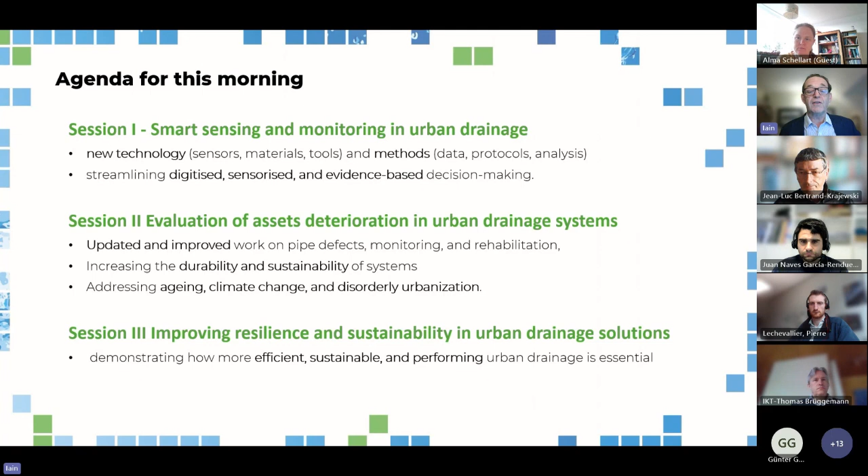Then the third session is looking at improving resilience and sustainability. For that, it's about having efficient, sustainable and good performing systems, and how we address consequences of things like pollution and flooding and urban vulnerability to extreme events.

As a reminder of what Co-UDlabs actually is, it's a Horizon 2020 project that has brought together 7 research institutes from around Europe. The purpose of Co-UDlabs was to get us working together to address common issues and to look at how we can learn from each other and how, in future, as urban drainage research facilities, we can encourage collaboration at the international level.

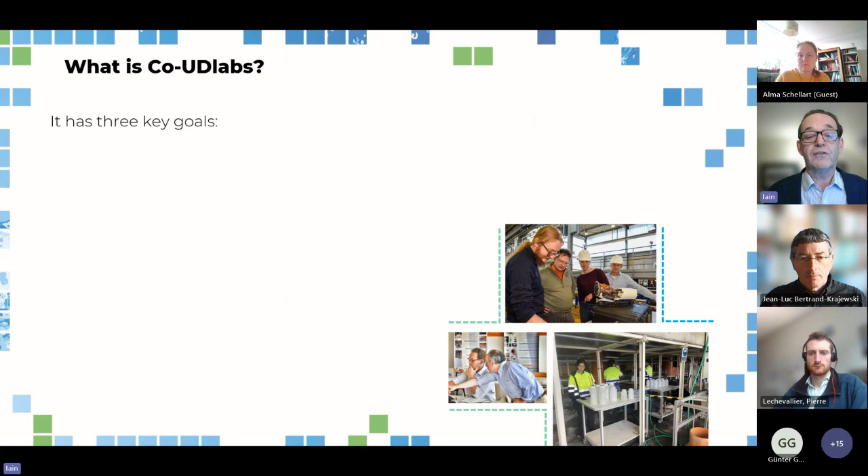Co-UDlabs has had 3 key goals over the last few years. The first, as I've mentioned, is fostering cooperation and providing networking. The second, and perhaps the largest element of it, is to facilitate transnational access. This is exchange and collaboration.

Under the rules, somebody from Germany could apply to do research in any of the other facilities, but not the one in Germany, and vice versa. The Brits had to go to mainland Europe to do their research. The transnational access has resulted in a huge amount of practical research work, some of which we're illustrating in the presentations we're doing this morning.

That is what that is about: we had 3 joint research activities, covered by the 3 sessions. This is where we, as the research organizations, undertook work with each other to address particular issues.

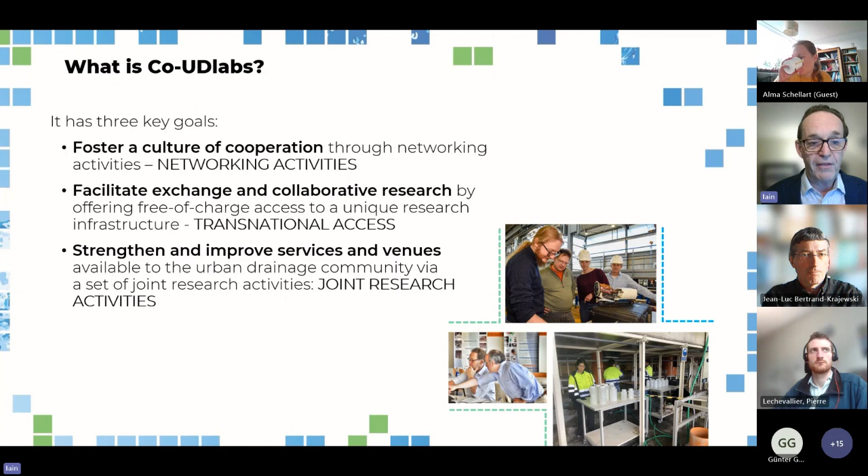We're creating this UDrain, working with the International Water Association and Joint Committee. We've started by putting together an inventory, an atlas of research infrastructures available in Europe and around the world. We want to build a community, and a lot of it's about enhancing uniform practices. This is one of the things we found early on, that we all do things slightly differently in different countries, and there's a need for harmonizing and ensuring that we work in a uniform manner.

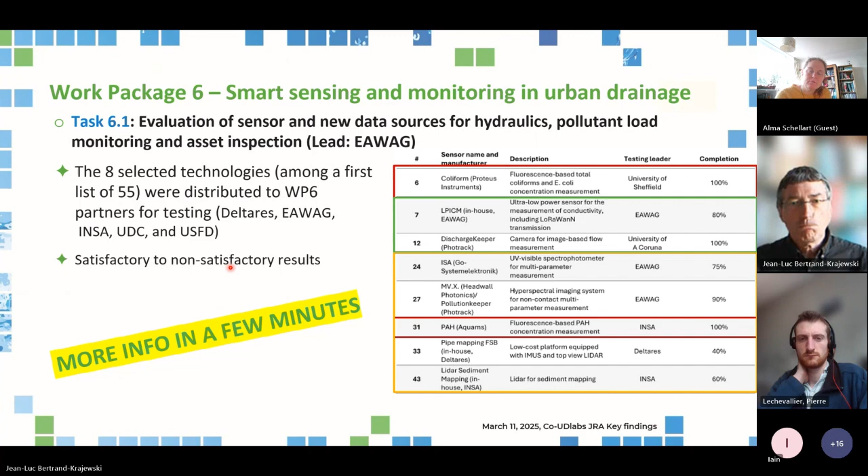For Task 6.2, we developed during the project a software tool coded with MATLAB, named UDMT, Urban Drainage Metrology Toolbox. It's a set of coordinated tools and methods implemented in an easy-to-use system, covering the whole chain from data acquisition - after you have calibrated your sensor or correlated it with traditional lab analysis - to collecting raw data from your sensors and transforming it into corrected data based on the calibration and correlation functions established in step 1.

Once you have raw corrected data, you can work one step further to assess the uncertainties in this data. Then you go to step number 4 with data validation, where different validation criteria can be tested. We've added a 5th functionality about tracing experiments, as a tool to check and validate some discharge measurements in sewers.

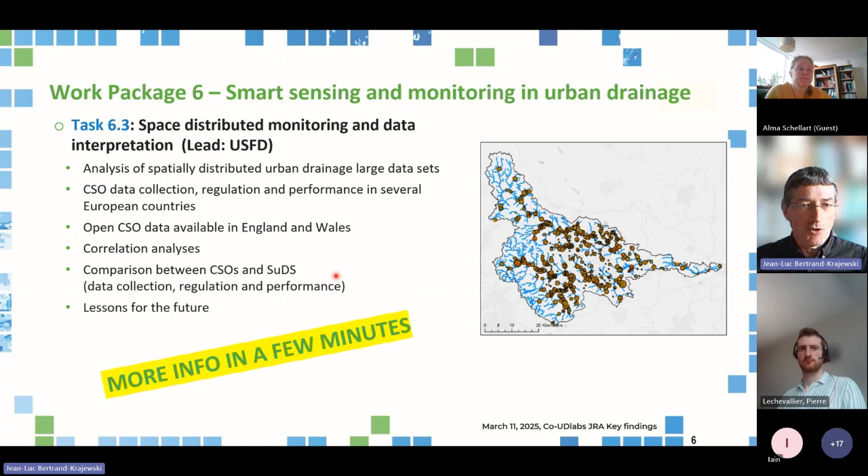Another key aspect of Co-UDlabs was implementing open science and open data sets. So all the data sets produced during the Co-UDlabs project, from testing the sensors to the code of the UDMT, everything is available on the Zenodo community repository based on the Co-UDlabs project. Again, everything will be updated by April, May 25. We invite you to go there if you want to access the reports, which are also available on our website, but more importantly, all the data sets generated by the project.

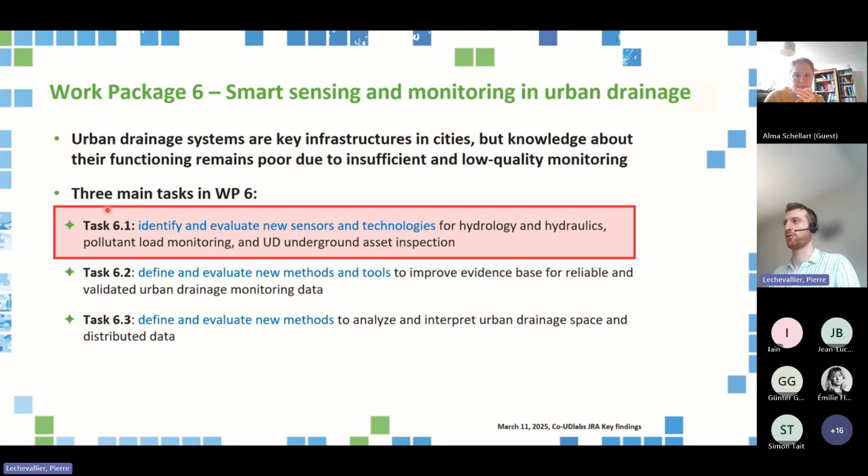So first of all, why is it so important to monitor urban drainage systems in a better way? The role of urban drainage systems, as you know, is to bring polluted water from their source of emission all the way to treatment facilities.

This task has two aspects. The first is to ensure that we protect the environment, so it's what we call the quality aspect of urban drainage systems. We want to bring badly polluted waters all the way to treatment facilities. But urban drainage systems also have another aspect, quantity, because those infrastructures handle not only urban wastewaters but also stormwaters, the water that falls from the sky when it rains. It can happen that lots of water all of a sudden enter the urban drainage systems. So basically, those two aspects, quality and quantity of the water, need to be handled by those infrastructures.

Now, if we want to avoid emission of polluted waters into the environment and better treat them, it's a good idea to have better monitoring of those systems, monitoring the quantity of water, the quality of the water, as well as the infrastructures themselves, seeing if the pipes are well maintained or if there are holes or cracks.

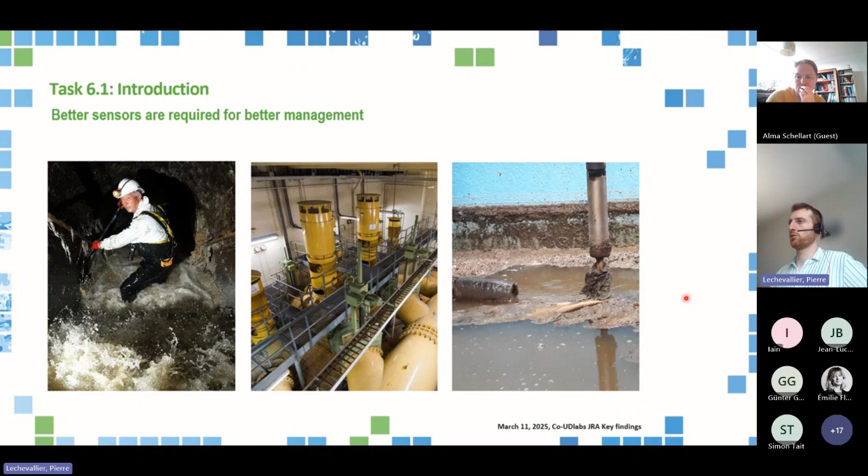So, as you know, in the project we decided to test 8 innovative technologies to monitor the sewers. We started originally with a list of 55 sensors, mostly focused on water quality and hydraulics, but also other aspects. Those 55 sensors were selected based on the opinion of all the members of the Co-UDlabs project. Everyone could propose a sensor to be tested, and we ended up with a list of 55 sensors.

From this list, INSA and EAWAG collaborated to reduce it to about 15 sensors, mainly based on our expertise. Once we had those 15 sensors, we asked again all the members of the consortium if they had interest in testing them and if they had facilities suitable to test them. That's how we ended up with a list of 8 sensors, along with a list of facilities that are motivated and have the capacity to test them. This whole process is described in much detail in deliverable 6.1, which you can already find online at this link.

Regarding the 8 sensors we decided to test, we have the Proteus sensor, which measures coliform. We have LPICM, the low power inductive conductimeter, a sensor able to monitor conductivity with very low power use. Then we have the Discharge Keeper, a camera-based sensor able to monitor flow. This is actually the only sensor we tested aimed at monitoring quantity; the other sensors are for quality.

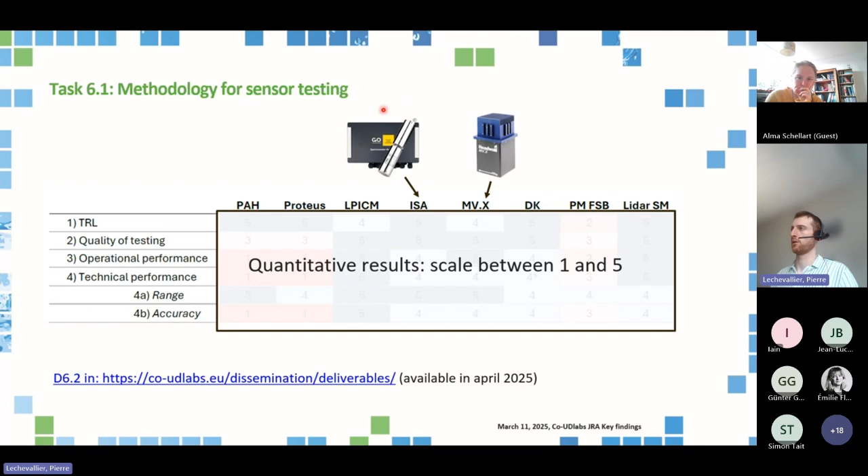First of all, about the MVX sensors. This is a hyperspectral camera. Basically, we are using a sensor which is a combination of a camera and a spectrometer. The advantage of such technology is that we're able to measure spectral information of the wastewater surface with non-contact sensors.

As you can see, for instance, on the picture in the middle, we did some laboratory tests of this technology where we placed some wastewater in this black cup in the middle. We used a light, and on the top, you can see here the camera that was actually monitoring the content of the sample. In terms of spectral resolution, the hyperspectral camera that we used is sensitive to the visible and near infrared range.

Which means between 400 and 1000 nanometers. The sensor is also encased in a metallic kind of box, so the camera is actually inside this box, which means that it's also suitable for application in the sewer systems. We had a field of view of 10 centimeters, and the sensor is able to estimate multiple parameters.

In the framework of the tests that we did for the Co-UDlabs project, we actually tested the sensors in 5 independent locations, one of them being the flume, which you can see on this picture, where we put some water through this channel, which is kind of a reproduction of what happens in the sewers. We were also able to test the sensor in 4 other locations.

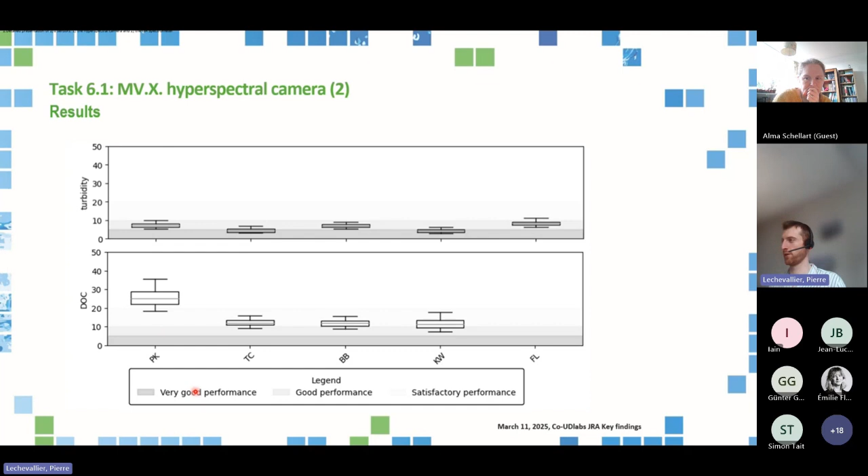All of this is discussed, and also the interpretation of those results is further discussed in the deliverable and in some of the publications that will be attached to the project. So I invite you to have a look at this if you want more details.

Now, let me speak to you a little bit about the ISA. So this sensor is also a spectrophotometric sensor, but it is based, this time, on UV visible absorbance between 200 and 735 nanometers. This technology, maybe you're already familiar with it. There are already some sensors that are using this measurement principle to estimate turbidity, chemical oxygen demand, nitrates, and so on. However, this sensor was particularly interesting for us in the project because it has a higher level of flexibility.

First of all, the sensor has an adaptable window. It is what I'm showing here or here. So basically, we can open or close the sensor and make this gap variable, which is very helpful if you want to adapt the sensor to each and every different wastewater type we are monitoring.

Another really interesting aspect of this sensor is that it doesn't have a pre-installed model, but instead it has a flexible model, which means that we can always use the sensor for the monitoring of new pollutants. We just need to train a new model. So this flexibility is something that was really of interest for us.

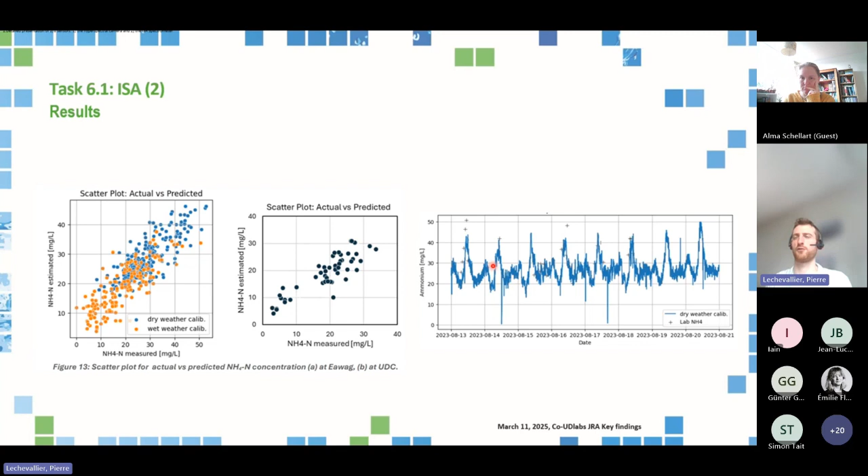So overall, we can see that yes, we verified that the ISA sensor is able to follow ammonium concentration with a certain level of precision, and that this sensor has the potential to answer our future needs when it comes to the monitoring of ammonium in the sewers.

Okay, so it's time to come to a small summary and conclusion. So I presented to you the MV.X hyperspectral camera and the ISA sensors, which overall are quite promising technologies, even if there is still room for improvement.

For the other sensors, you can see that some of them are also performing really well, while some others have shown worse performances. So yeah, if you are more interested in every single sensor and in all the details, I really would like to invite you to have a look at the deliverable that is coming quite soon, where we discuss all this in much more detail.

And if you have questions, I will stay for the first question session, which is going to be conducted right after Alma's presentation. So now I'm done with this presentation, and I will give the floor to Alma.

Thank you, Pierre. Keeping nicely to time.

Right, thank you. You can see my slides. Yes, we can see your slides, Alma.

Perfect. Thank you also, Jean-Luc, for the introduction. This is the last part, the last task of the 6.3 task, where we wanted to look into how we can get to more evidence-based management of drainage systems, and how we can use the growing data sets we have, but not everywhere. We also looked at the England and Wales CSO data set.

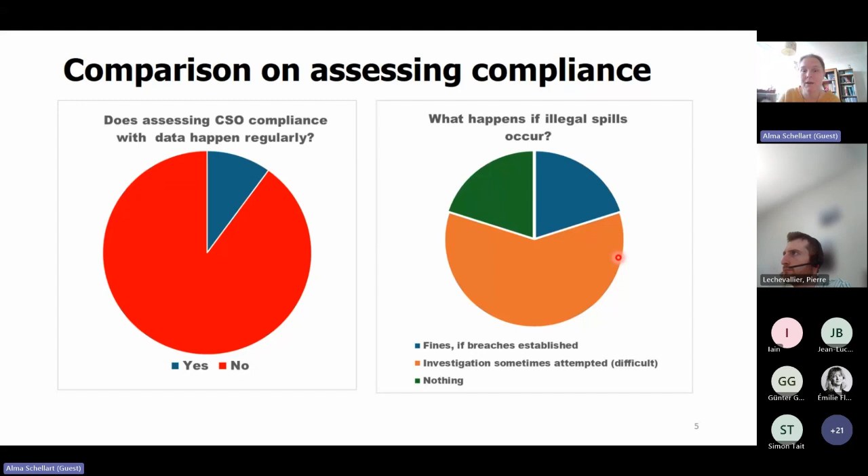We had a big discussion on regulation type, because ideally we look at both what comes out of the sewer system as well as the receiving water impact. There's emission-based regulation, which might be easier to monitor - you have frequency of spill, or volume of spill, which is already a lot harder, but it still doesn't tell you about river impact. Some areas are starting to have, or already have, receiving water impact-based regulation. That would seem more scientifically sound if you really want to see how CSOs are harming the receiving water, but it's really complex to implement in practice and therefore doesn't happen very often. Or if it does happen, people may not look very well at uncertainties or all sorts of data. So it's very complex.

So I did actually look in England in the next planning period for Yorkshire, for example, only 2 catchments. First of all, we look at the emissions and look at maybe any evidence of complaints, for example, or any fish kills or anything. Only after lots of deliberation, only in some areas, do people really look at impact.

So for the next 5 years in Yorkshire, 2 catchments are required to have an impact-based regulation compliance - impact of intermittent spills, of CSO spills. This is about £1.7 million, just for the data collection and the simulation to check compliance with the impact-based regulation. So that's 28.8 kilometer river length, approximately 1% of the main river length in Yorkshire in a 5-year period.

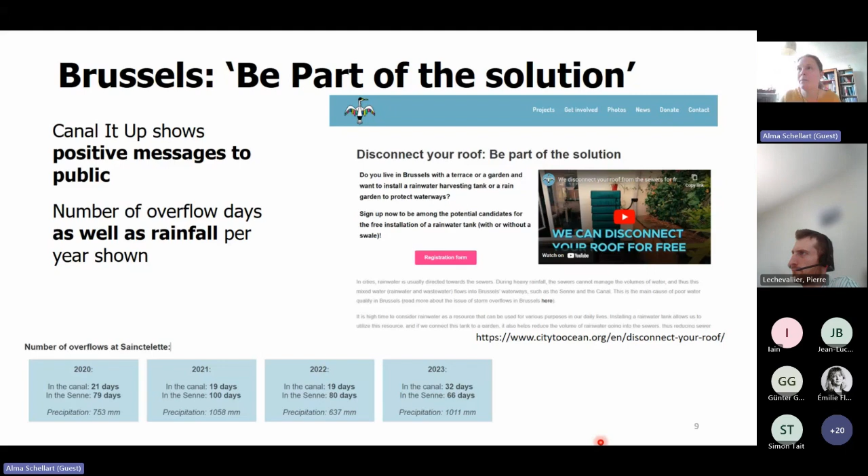Sadly, in England, there's also quite a big outcry of the amount of CSOs, but also a lot of really unhelpful press. So in Brussels, the water utility kind of really sat down with the NGO to discuss how to make this data public and how to educate here.

In England, it was more like the NGOs just took and ran with it, and the water companies kind of really lost the sort of communication around this data. So a lot of bad press, even to the fact that there's been some newspaper article on workers being harassed in the street, and well, quite a concern about lack of people, or lack of skilled people.

I mean, we have that in the whole of Europe, but of course this is a big worry, because I might talk informally to people, some of our PhD students, some of them even a bit worried about presenting their results in England when they are sponsored by a water company.

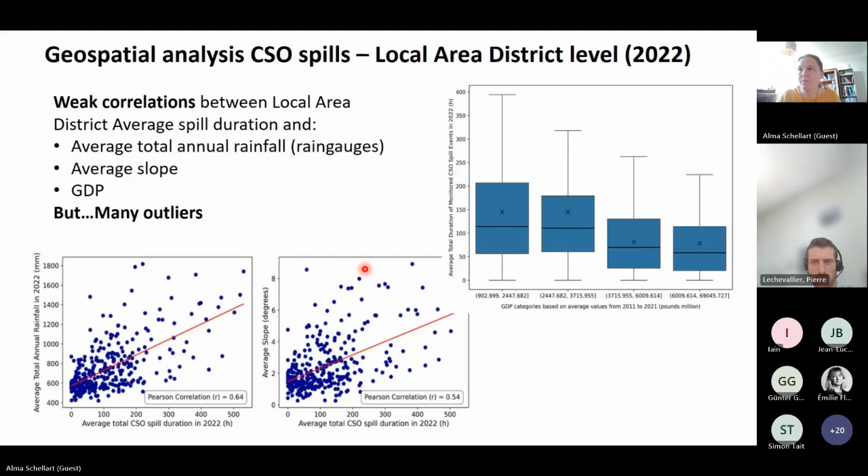Then we tried to do a spatial analysis on a smaller scale using self-organizing maps, where we analyzed CSO count and duration per sewer catchment and linked this to a number of geographical as well as socio-economical parameters, and also the rainfall. This time we took radar rainfall because it's the 1 kilometer, 5 minute resolution.

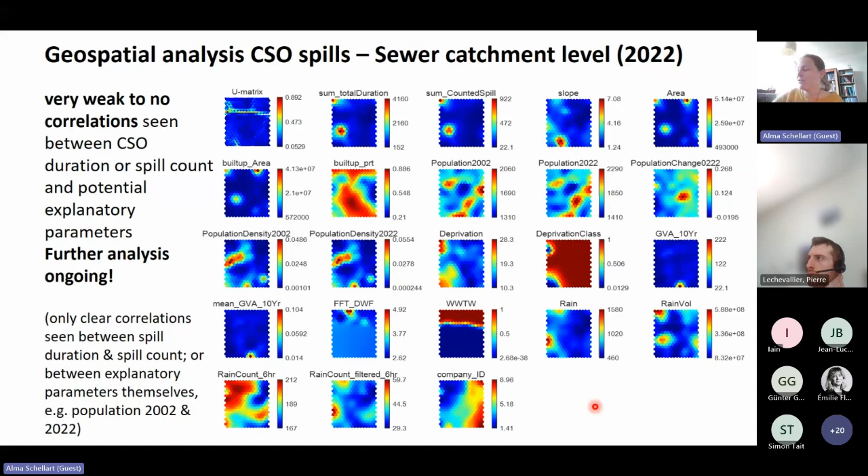It's a bit difficult, and for a large part of the areas we actually struggle to link the treatment plant clearly to the CSOs. This was not as easy as we hoped, maybe from the open data. So we really struggled to find correlation here—we think it's lots of other parameters. The main thing we did find, which I didn't show, is that about 70% of spills happen at the works, which are, of course, managed to protect the works, not the spill historically. So you use the spills to protect the treatment works.

So just an overall conclusion: although in England we have a lot of data, it's not collected or widely reported in Europe. We have a lot of local regulations, but the process of this compliance assessment is currently opaque and doesn't happen regularly due to various difficulties.

Now, in an ideal future, this public data will be more transparent—you can hold water utilities to account, but this has to happen very carefully. You have to really carefully check this narrative with your local interest groups and citizens groups to not get a lot of unhelpful negativity, and we get a very different experience where this data is made public. So it's still an open question how we can make this data open, and there's an importance of quite clear explanations and positive messaging needed, also for attracting the future workforce, of which we are short.

In detail from England and Wales, we found relatively weak correlation between CSO spill duration and rainfall seen at larger scales, but not much strong spatial correlation with many other hypothesized explanatory parameters. So there's likely many local factors influencing the occurrence of CSO spill, which is actually what we also find in literature. There's no simple correlation between observable variables and receiving water quality impacts, which makes establishing effective regulatory standards really challenging.

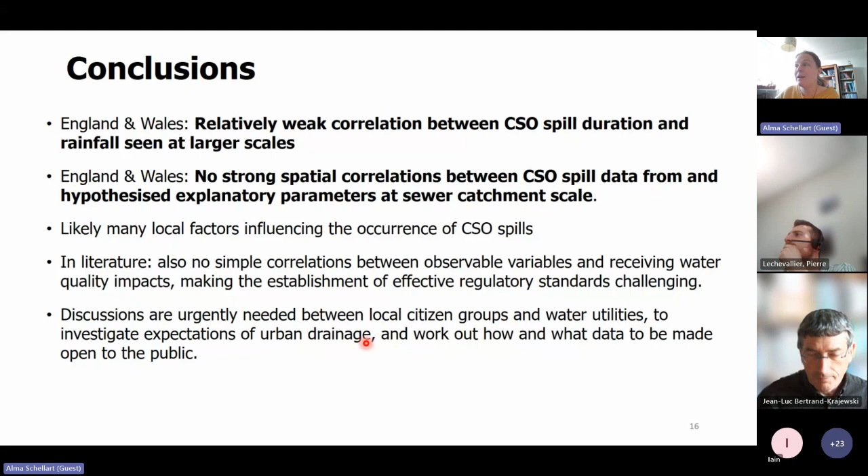Discussions are really urgently needed with citizen groups about what people actually expect from their water, what would make people willing to pay more for solutions, and how we can better make data open to the public.

The details on this are found in deliverable 6.4, which is already on Zenodo, and there's also still work ongoing in our spare time at the moment. Some initial parts were presented at ICUD.

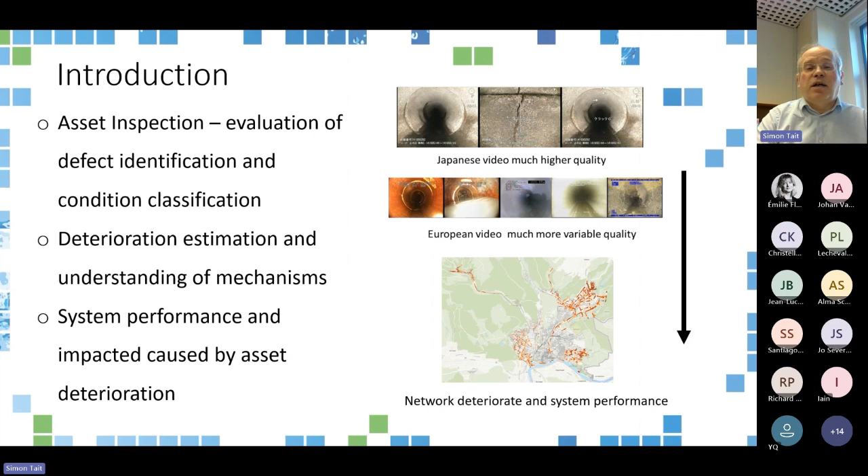So we did some work looking at automatic defect identification. One of the things we did first, on the left-hand side, is we looked at the condition classification coding that we have in Europe now, which is very complex with lots of subclasses. We tried to look at which classes, which types of defect actually impacted system performance, and then we took the existing classification and simplified it into key defects.

We then looked at a method called deep learning for images to see if we could classify images automatically. If you classified images based on these more limited classifications, you had quite successful identification, or automatic identification, that you can see on the right-hand side.

We also took some historical information from asset inventories, pipe failures, and rainfall data, and used a technique for unsupervised learning called self-organizing maps. We used this technique to identify key input variables, and then used some supervised machine learning, a random forest type classifier, to get the risk of where you're likely to find defects within a system.

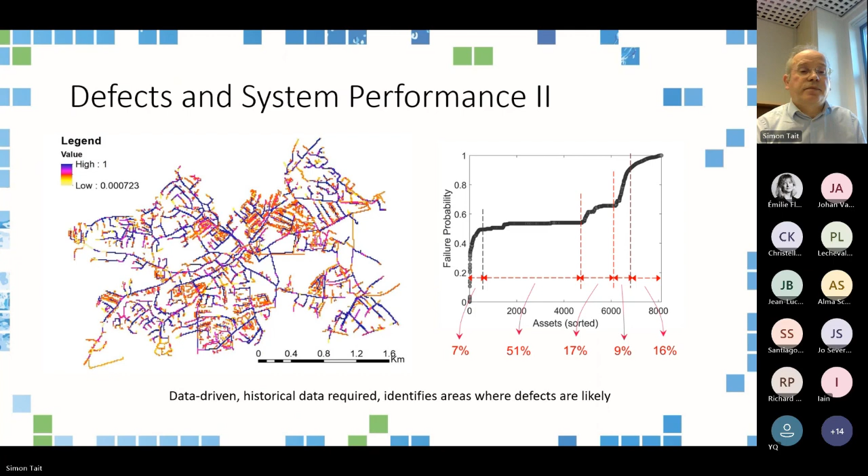Now these concepts are important because you measure asset condition at unique points in time, and it's important to be able to predict whether these assets are stable or whether they will suffer sudden deterioration.

We saw that there was a gap in actually measuring deterioration in the laboratory, so we devised more accurate ways than just images of defects. You can see here a 4-camera inspection system that aimed to not only identify the defect, but also the size of the defect itself.

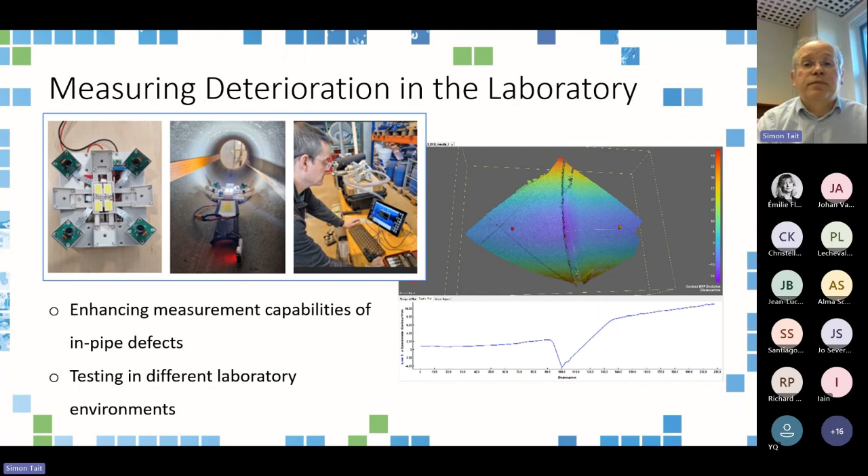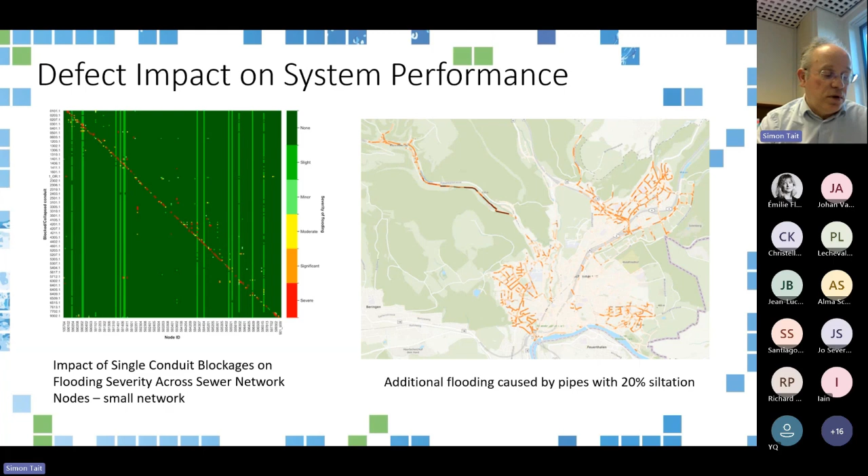Let's have a look at the conclusions of JRA2. We had 3 target areas. We wanted to look at inspection technologies and opportunities to improve them. We also wanted to carry out laboratory experiments and examine deterioration mechanisms. And we wanted to develop modelling approaches to look at the impact from individual pipe defects on whole system performance. I think we accomplished all 3 of those.

We explored image-based methods to automate defect identification, and a crucial aspect was looking for more simplified defect codes. We had defect codes that fell into 8 groups; the Japanese have a defect coding system that looks at 5 groups. So our argument, from what we got from the measurements, is that you need more physically relevant defect classification, looking at groups that would have an impact on system performance.

Looking at deterioration of defects is quite new. Most times we just have one snapshot of a defect. Some CCTV data has been redone, maybe several years after the first observations, but that's quite rare. What we wanted to do in the laboratory was to stress pipes by loading them to look at, in our case, infiltration. So we did work to make sure the defects we used in the lab were transferable and representative, and we also had a preliminary study on infiltration and exfiltration that Thomas will talk about.

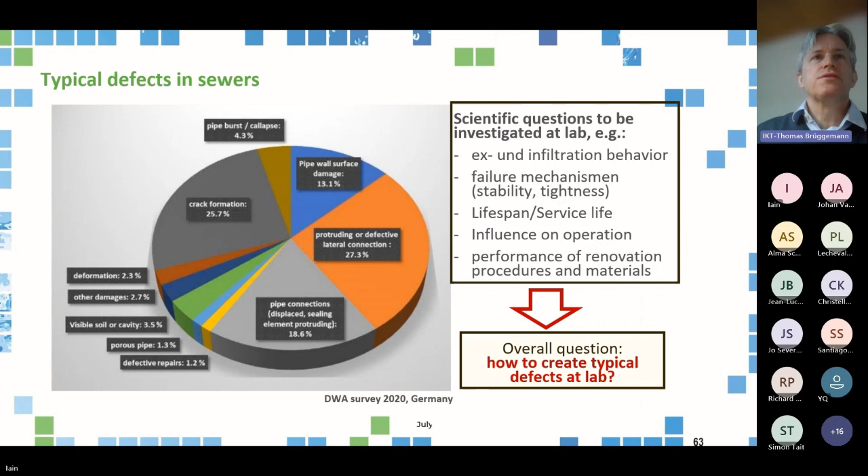Next slide, please. When you want to create typical defects at lab, what do you have in mind? First of all, the scientific question should be clearly defined to select the appropriate defect. You should use a defect at lab with its relevance in terms of its frequency, location, and occurrence in reality.

I think that makes sense. The defect at lab should be based on characteristics of the corresponding defect in reality. And it's very important to ensure the reproducibility of the defect at lab. So, for example, you should use a template or stencil, or the same tools should be used when producing them, and the same materials should be used.

A detailed, traceable, and transparent documentation of each step in the production of defects at lab should be made, beginning with the process of decision making, choosing a relevant defect, up to the planning and up to installation. This is needed for justification and argumentation, following the FAIR data principles, I would say.

We would recommend that network operators, municipalities, and water companies should be involved in decision making to ensure practical relevance. For example, at IKT we work closely together with municipalities, which are part of a project steering group, deciding which damages or defects are relevant, and so on. Next slide, please.

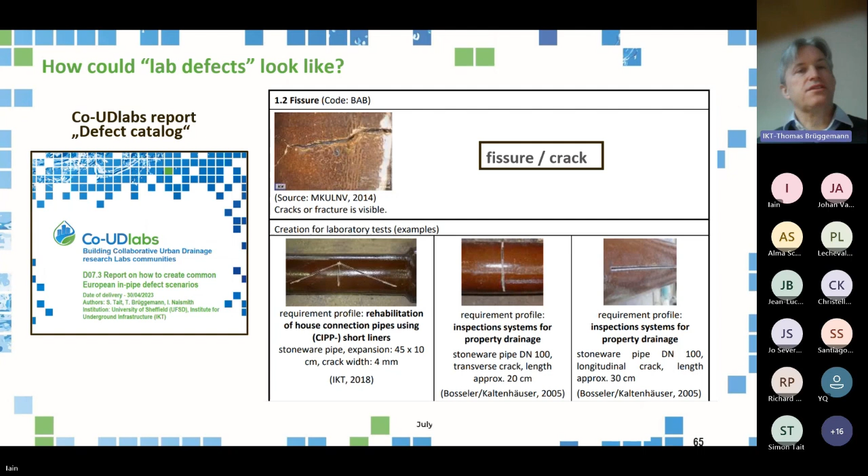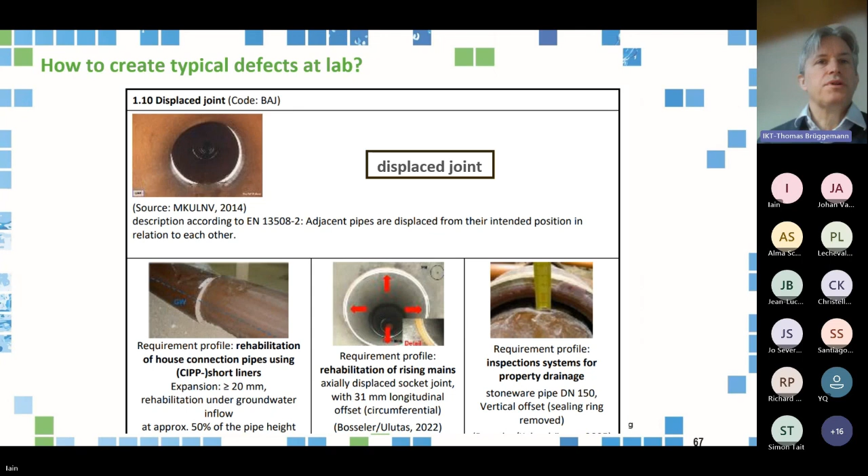This displaced joint and infiltration, also exfiltration, was put together within Co-UDlabs just to create a special defect: damaged sealing at the pipe joints, combining it with the displaced joint.

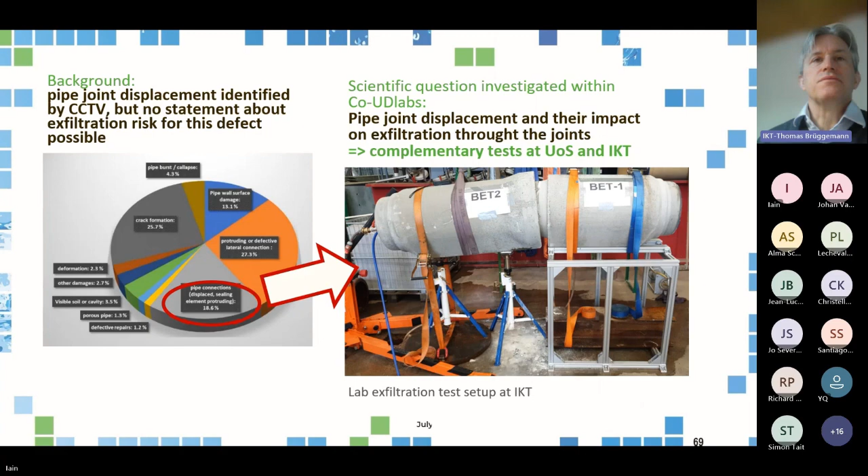The question, or the background, was that pipe joint displacement can be identified by CCTV, but you are not able to see any exfiltration or exfiltration risk for this kind of defect. This defect pipe connection belongs to the three main defects in this evaluation of the DWA. So therefore, we created a test setup at IKT and also a test setup at University of Sheffield at ICAIR. First of all, we built up a test setup at IKT. I'd like to explain now.

We put two pipes together, without surrounding soil, measuring water exfiltration at this test setup at IKT under changing conditions. For example, we changed the pipe material. We did these tests with concrete pipes, with clay pipes, and also with plastic pipes. Changing of conditions during these investigations also involved varying angles at pipe joints. That was interesting for us, to see if there is exfiltration and how much water will come out, with and without damaged sealing. That was also the question of these tests, to see if there is a difference when you damage the sealing, if more water comes out.

Then tests at University of Sheffield were done, nearly the same tests but with surrounding soil, measuring the water exfiltration rate also under conditions like using pipe material concrete and surrounding soil. That was the other situation, and a load was put on the pipe connection to create pipe joint displacement, applied with a cylinder.

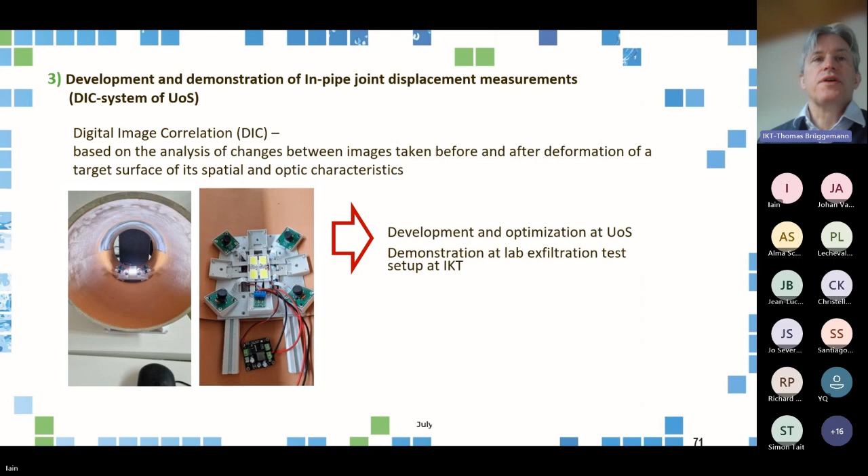What are the conclusions of these investigations at University of Sheffield and at IKT? First of all, we have to say that there's a high level of water tightness for a wide range of pipe articulation for clay, concrete and plastics. But there's a difference between clay and concrete pipes and plastic pipes, because clay and concrete is very stiff material. So stiff pipe sections continue to deform the joint seals as articulated to higher angles.

Higher exfiltration rate than PVC plastic was observed. For plastic, I can say that for an articulation angle more than 2 degrees, the pipe itself deformed while the joint geometry remained similar.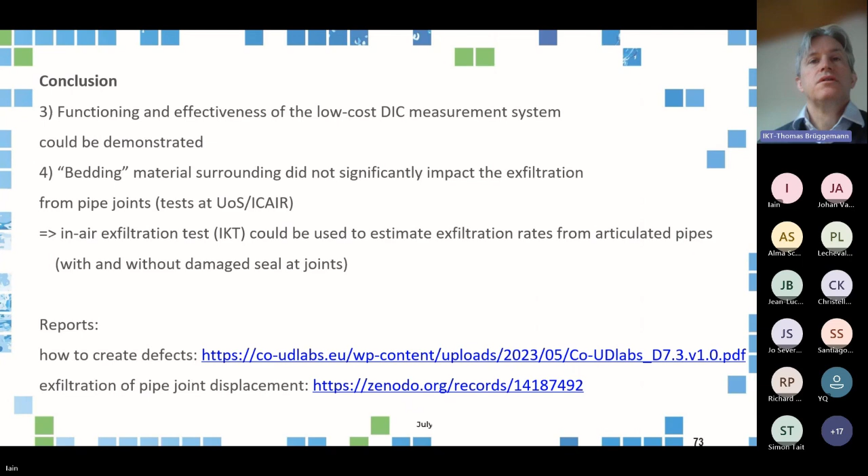Okay. Everyone see the PowerPoint? It's not appeared just yet. Okay. Yes, I think your camera, yep, that's fine. Okay, over to you. Okay, good.

As briefly introduced by Simon, this piece of work I've done is looking at the defects and deterioration of assets in a sewage system and how that will affect the hydraulic performance of the whole network.

So the vulnerability of the assets to the performance caused by the defects is examined by analyzing the location and the volume of flooding caused by the deteriorated pipe. So we have made all the analysis in SWMM, and we've performed a case study with the sewer network at Schaffhausen, Switzerland,

which stands on the right bank of the River Rhine. On the left-hand side, this is an overlook of the whole system in SWMM. We've tested with two types of defects, which are siltation and root intrusion.

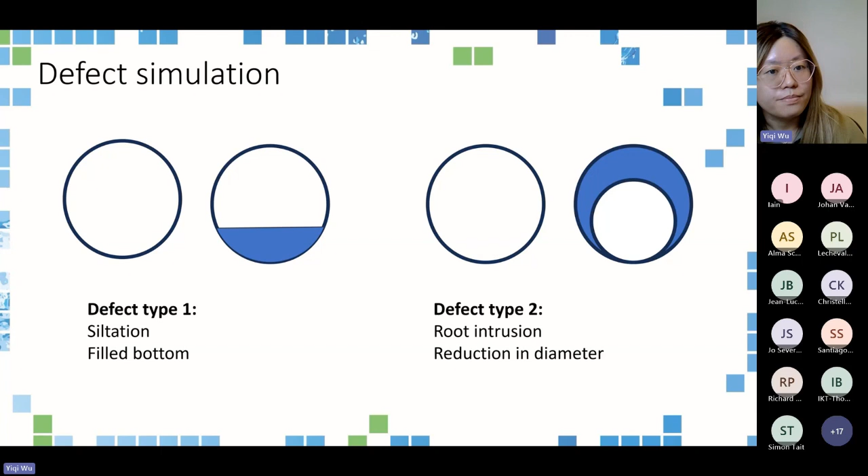And we have tested with 3 rainfall scenarios. So we've chosen a real-time rainfall event, which lasts 2.5 hours. We chose it because it's short duration, which helps us reduce the simulation time required.

And this particular event also has a quite high rainfall intensity. We simulate with 100%, which is the original rainfall event, and then we reduce it to 50% of the intensity and then 30%. So here's an outline of the methodology.

So we've chosen the rainfall events and deterioration level we want to start with, and then we run the simulation, assuming all the assets are in acceptable condition to establish the baseline performance of the model.

And we deteriorate one pipe at a time by changing its characteristics, the parameters, to mimic the loss of serviceability. After we run the simulation, we extract the results and compare the flooding volumes with the baseline. And if that pipe caused additional flooding, it is a critical pipe, and if it's not, it's not critical at this rainfall level.

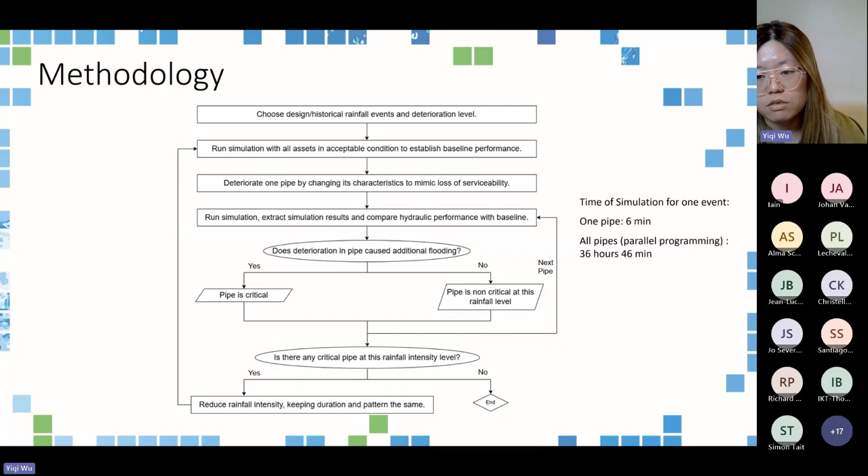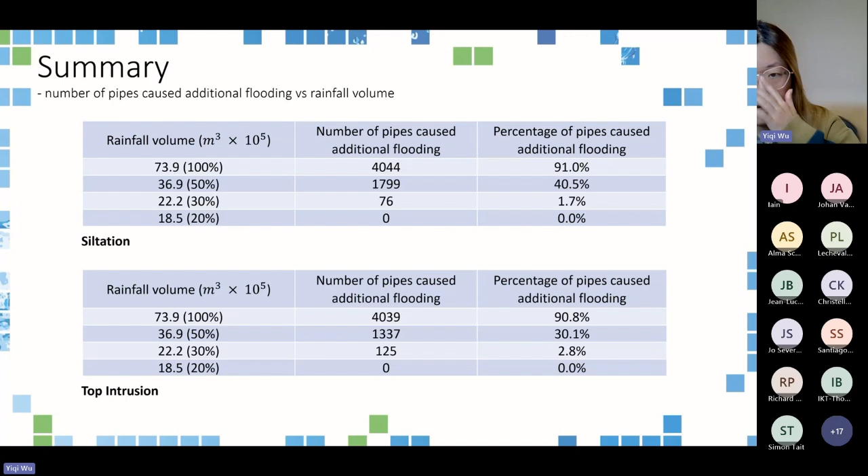So we've also looked at the overflows under various rainfall patterns and with the siltation scenario in this case. There's 3 events we've looked at. Event one has high rainfall volume and also a relatively long duration. Event 3 is actually the one we've used in the previous study, and it has a shorter duration, but also the intensity is high.

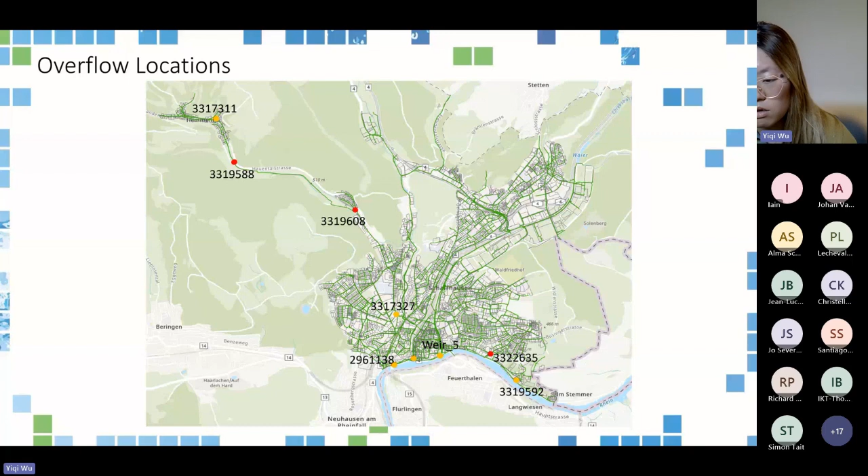And we have 9 overflow CSOs here in the city. With event 1, where we have a long duration and high intensity, 8 of them have overflows within the simulation. For the next event, which has a shorter duration, only 3 of them have overflow. And for the third event, which has a low intensity, it has no overflows.

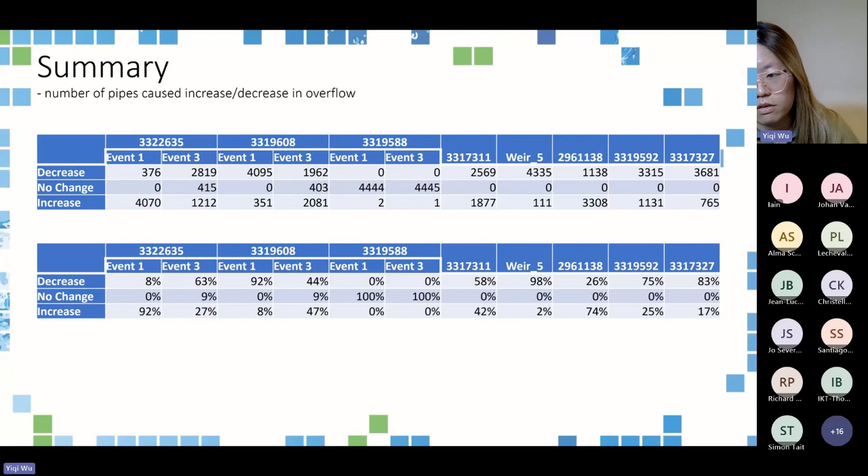But for the second overflow, you can see that the result is reversed. So when it's blocked, it actually decreases overflows. Which basically means, well, if you look at the overflows, it's quite important to look at the local network setups, because that will have a big effect on how the pipe is going to affect overflows in general.

So in conclusion, the flood risk pattern can vary for different defect types and different rainfall scenarios. And for the case study we had, the analysis shows that the pipes near the outfalls and the northeast part of the city are more prone to flooding when there are defects, which means these areas will probably be the priorities when people are going to do maintenance jobs.

And the defects in pipes can lead to both positive and negative effects on the system overflows, and the extent of these effects is influenced by the pipe location and the characteristics of the network.

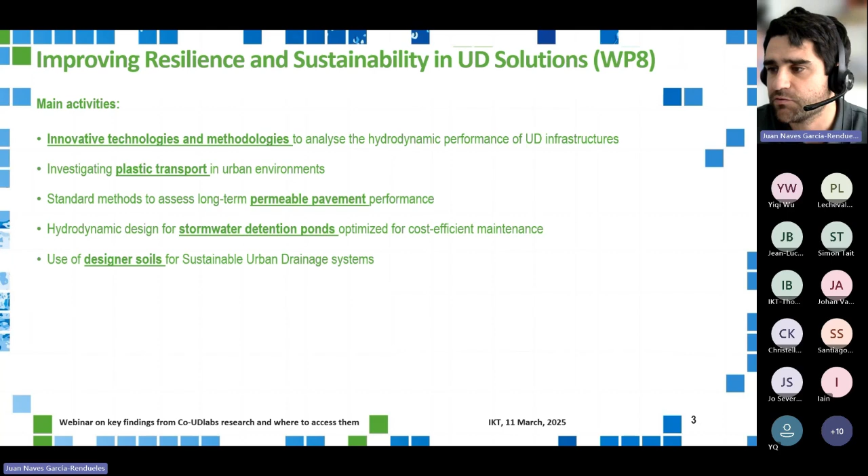So the main activities are related to assessing innovative technologies and methodologies on urban drainage infrastructure, the investigation of plastic transport in urban environments, assessed methodologies for the characterization of permeable pavements and its long-term performance, and some work on the hydrodynamic design for stormwater detention ponds, and the use of designer soils for SUDS - sustainable urban drainage systems.

We are going to have a specific presentation by James Shucksmith related to hydraulic energy losses and transport of contaminants during sewer-to-surface flow interactions and flooding network surcharge events. And finally, we are going to have one presentation by João Leitão from Eawag on the long-term performance of blue-green infrastructure, specifically the influence of leaf litter and sun on the water balance.

So starting with the new techniques that we have assessed - these are new techniques to build up a high resolution geometry of urban drainage infrastructure.

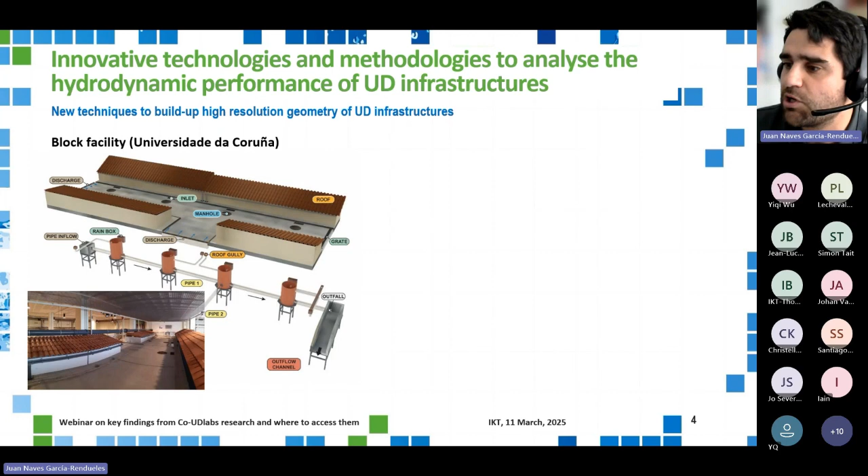We have used this BLOCK facility, a 1:1 scale, 100 square meter surface with two crossing streets and roof buildings, and a sewer network below this surface.

For taking the digital terrain model, we have used a LiDAR and a RealSense depth camera. These sensors are not cheap, but are also not expensive, less than 400 to 500 euros. We have also assessed the use of photogrammetry with structure from motion technique.

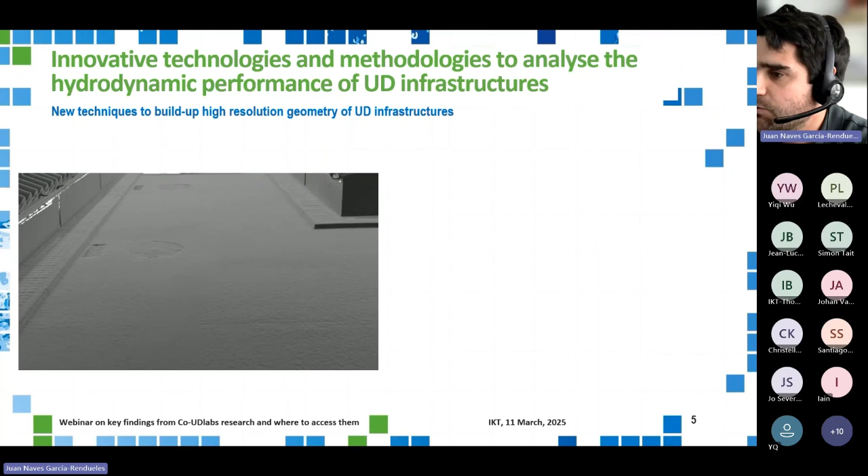You can see here the detail of the digital terrain models that we are obtaining with these devices. Our purpose was to obtain one 3D model for each of the techniques, for the surface and also for the roofs.

We are currently analyzing how this topography, or the accuracy of this topography, is affecting hydraulic results, for example in the flow entering the inlets. Due to the very shallow flows and the impervious nature of urban catchments, the sensitivity of the results to these topographies is quite high, and we are trying to quantify it.

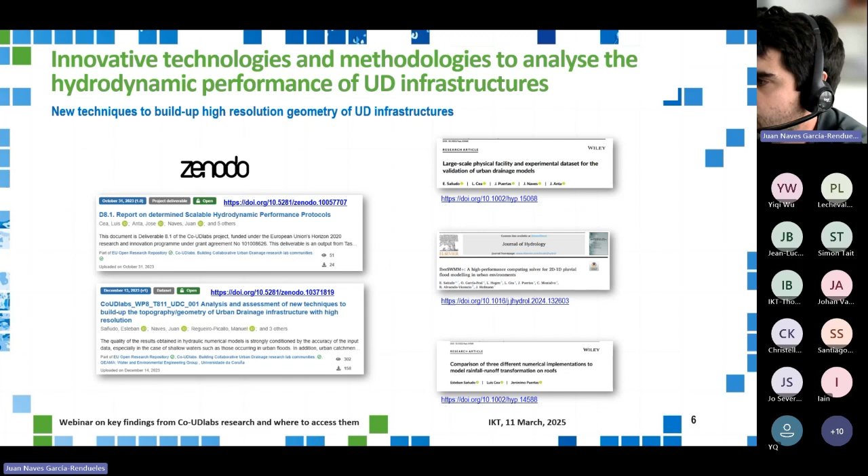If you want to know more about this, it is explained in detail in deliverable 8.1 of the project. I also wanted to leave here some links to the data sets, and some related publications on the numerical model we are using and this comparison between topographies.

We have also assessed the use of imaging velocimetry techniques for urban drainage applications. With cameras, we record the surface flow on the street, and through tracking of particles, using software like OpenPIV for example, we can determine and estimate velocity field vectors, finding the surface velocity of the water on the urban surface.

Why is this interesting? First, to validate and calibrate numerical models. It's interesting data to know more about the performance of these models, and also to understand other associated processes, like the sediment wash-off on the street during rain events.

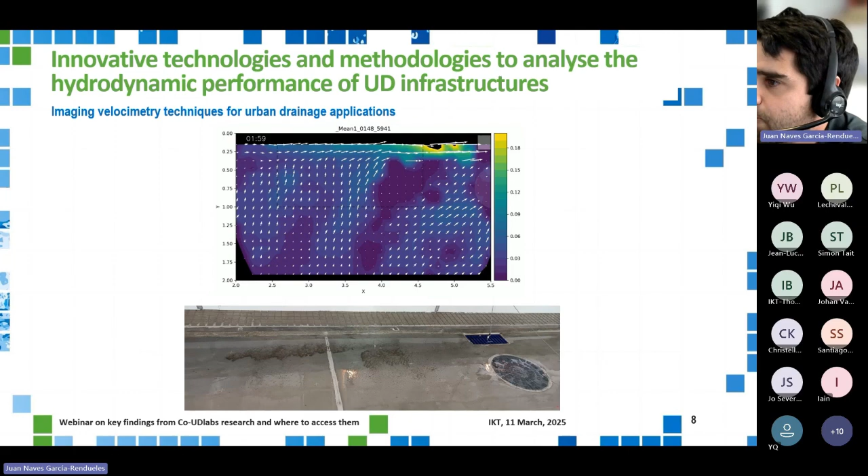For example, this is a hydraulic characterization of one part of the model that we used to understand tests we performed on the wash-off of sediments during a transnational access here in La Coruña.

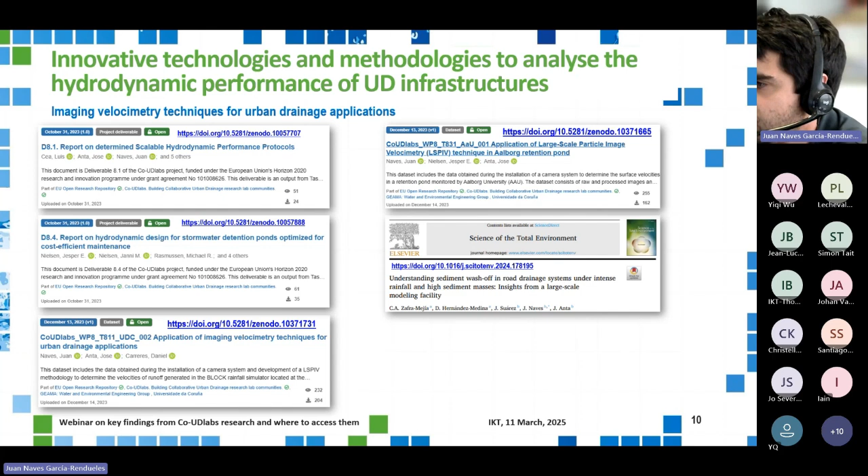We have also used this technique to obtain data on surface velocity in the retention pond, or sediment retention tank, at Aalborg University, in a collaboration performed in the frame of deliverable 8.4. If you want to know more, I leave here some links to deliverables, data sets, and publications on this topic.

The last device is the use of temperature sensors or temperature measurements for estimating sediment depths. This work was developed by Manuel Regueiro in his postdoc, as a collaborative action with the University of Coruña, EAWAG, Deltares, INSA Lyon, and Coventry University.

The idea of this sensor is to place temperature sensors at different levels in a gully pot, for example, and measure the temperature. The basis is that in dry weather, you have the same temperature in the sensors that are in the water and also inside the sediment layer.

When a rain event occurs and cold storm water comes to the gully pot, the temperature of the water reduces quickly, but the temperature of the sensors inside the sediment layer reduces in an attenuated way. By studying this different behavior between the temperatures in the water and inside the sediment layer, and applying the heat transfer equation, Manu and we can estimate the depth of the sediment layer in the gully pot.

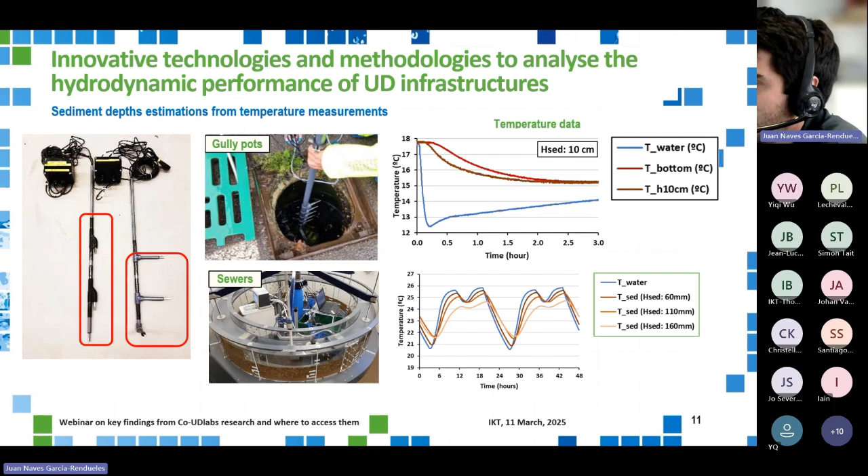If you want to know more about this technique, you can ask Manuel Regueiro or consult his recent publication on this topic.

The plastic transport in urban environments was also a research line included in this work package 8. As you see here, in this study we have studied the incipient motion of macroplastic in urban environments. This work was performed in the frame of a transnational access, but also relates to work done in this joint research activity, and was collaborative work with the Karlsruhe Institute of Technology.

Another cool and interesting experiment is this experimental campaign on the time of retention of macroplastic inside gully pots, with different kinds of macroplastic, such as paper, chocolate wrappers, or bottle caps. They do statistical analysis to understand the behavior of these macroplastics inside the gully pots.

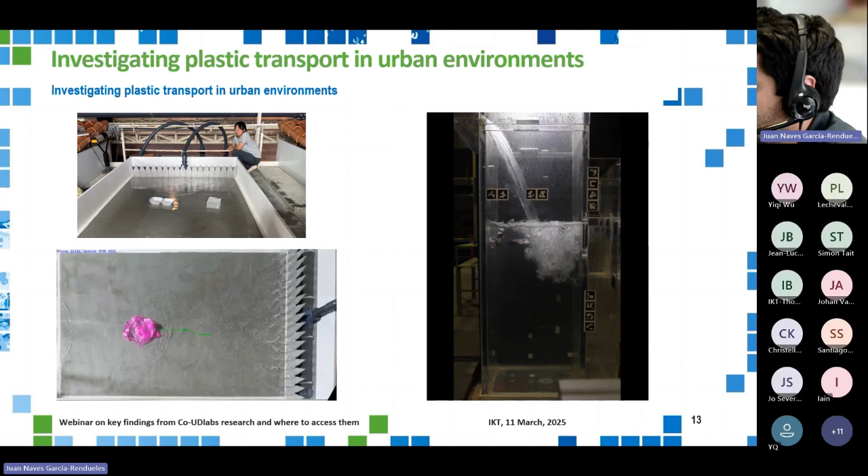Also in this research line, INSA Lyon investigated the interception of macroplastic through a settling basin, called the DSM flux, developed recently by them and designed to monitor CSO discharges and trap part of the particulate pollutants that come with these CSOs. With the Co-UDlabs project, they developed a methodology to measure the trap efficiency of macroplastics of this device, and performed experiments showing a trap rate of around 25% of the particles.

If you are interested in this experiment, you can check our deliverable 8.2.

Regarding permeable pavements, at the beginning of the project we observed a wide variability in the methodology and methods used to characterize the initial permeability and also the long-term hydraulic performance of this kind of solution. Our purpose was to review these methodologies and assess them using different rainfall simulators, one at IKT and one at the University of A Coruña, both with 1 square meter test areas.

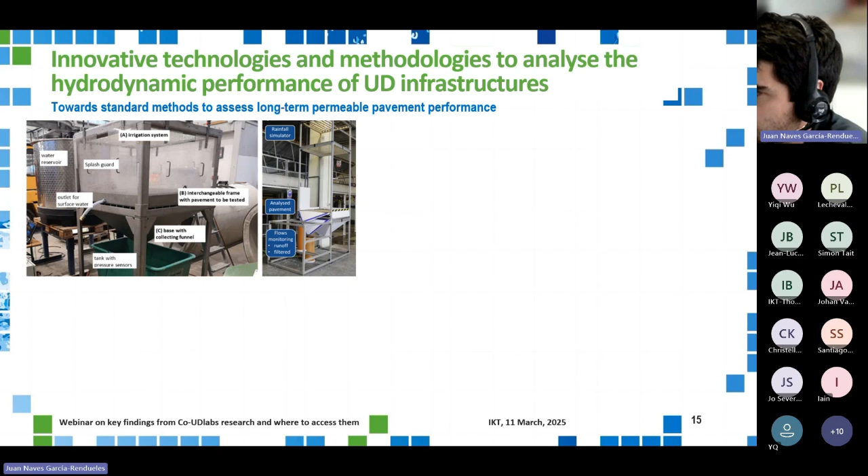In this rainfall simulator, we tested different pavement typologies, like porous asphalt and interlocking permeable pavements. We used different sediments to simulate clogging, for example Millisil, a very fine quartz sand specified in the German standard. We also used microplastic as tire dust, and real sediment collected from a parking lot on the campus here in A Coruña.

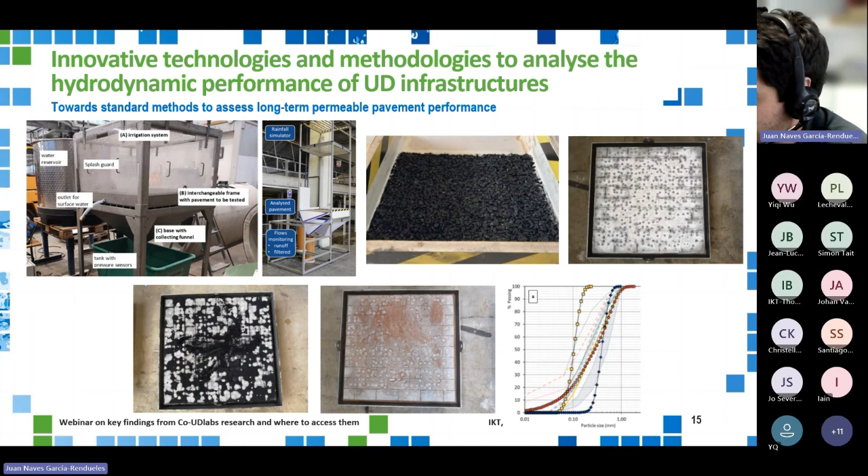This real sediment was also used with different granulometry, and the idea was to assess the influence of all these variables in our tests, to contribute recommendations toward standard methods that make experiments comparable between different research groups. With these results, we also did experimental work on upscaling.

We used a porous asphalt in a 1:1 scale, 36 square meter facility, distributing sediments in different steps to simulate clogging, measuring the inflow of water coming from inside the asphalt, measuring water levels inside the asphalt during rain events, and also punctual permeability on the asphalt to track that clogging.

If you want to know more about these studies, you can go to deliverable 8.2, some datasets we have already published on Zenodo in the Co-UDlabs project community page, and also some related publications I leave here.

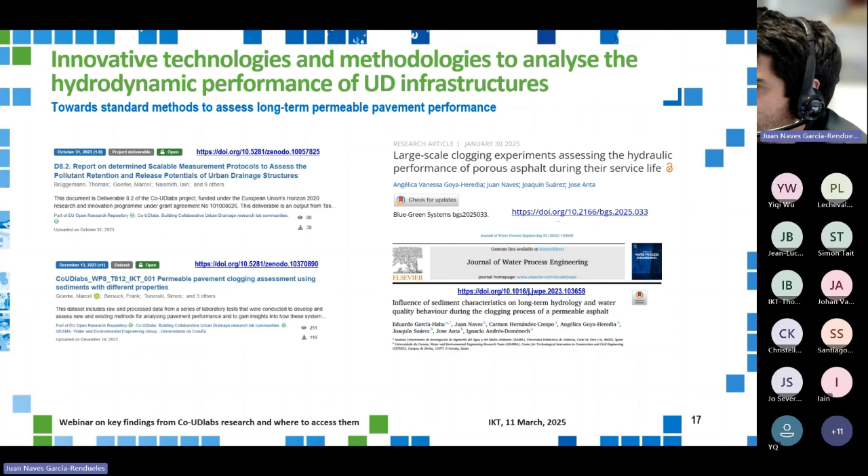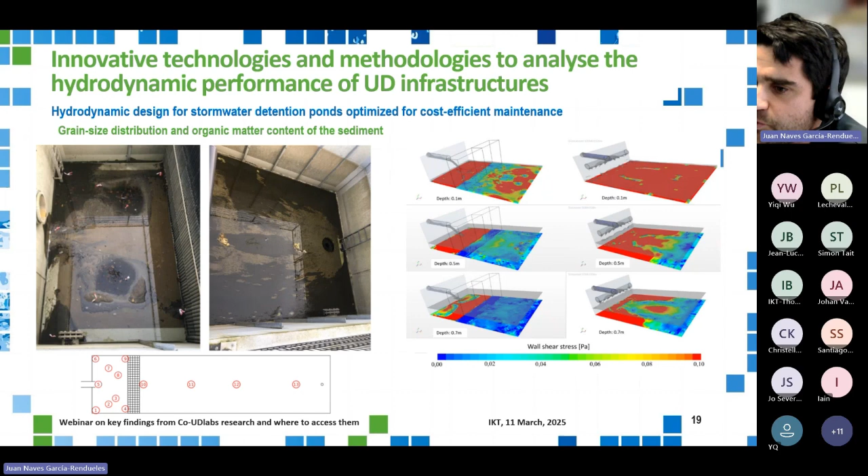You can find more about this in deliverable 8.4.

In another activity carried out in the frame of work package 8, INSA Lyon led a comparability analysis between natural soil and Harroton substrate, a material made by a company in Germany. This comparison was performed regarding physical and hydrodynamic characteristics, along with continuous monitoring of flow, conductivity and turbidity, and sampling and chemical analysis of dissolved organic carbon and heavy metals before and after the substrates.

The results are promising for Harroton substrate, and you can find further information and interesting related results in deliverable 8.5.

I have no time to go deeper on the results. Finally, the University of Aalborg has been developing a preliminary version of a user-friendly model for design of a filter soil under a basin for local area infiltration or soil-based sustainable urban drainage systems. The developed 1D model runs in MATLAB, and the main design criteria are sufficient water infiltration to avoid flooding above the basin level, and sufficient residence time and retardation of selected environmental impact chemicals to give time to treat these pollutants. Preliminary tests indicate the proposed model successfully identifies filter medium design parameters capable of meeting both criteria. This work has resulted in a promising modeling platform for designing soils in SUDS, which will be further tested and refined by the University of Aalborg.

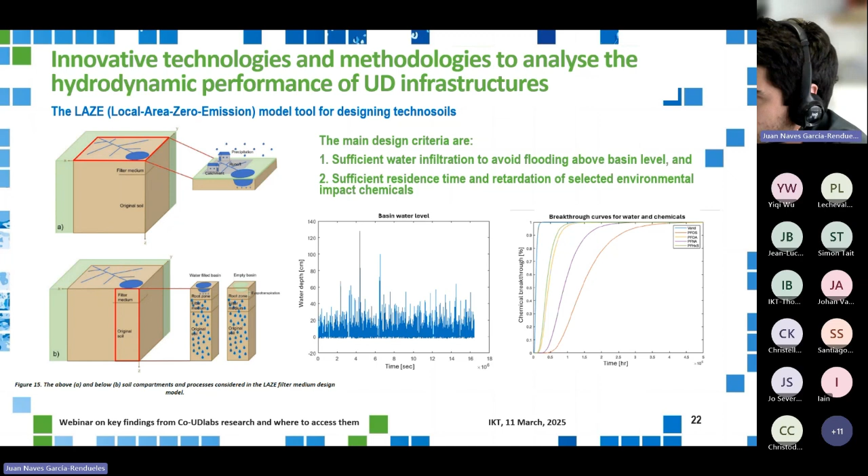You have here some of the results of the model on water depth and also in chemical breakthrough. You can see more of this work in our deliverable 8.5, and I leave here a link for a related publication of INSA Lyon.

Where to find all of these links in these slides? I think we are going to share this after the webinar, and you can also go to the Co-UDlabs website in the dissemination section, where you can see the deliverables and publications. Also in our Zenodo community of Co-UDlabs, you can go and search the publication that you are interested in, and filter by project, deliverable, dataset, or presentation journal, as you want.

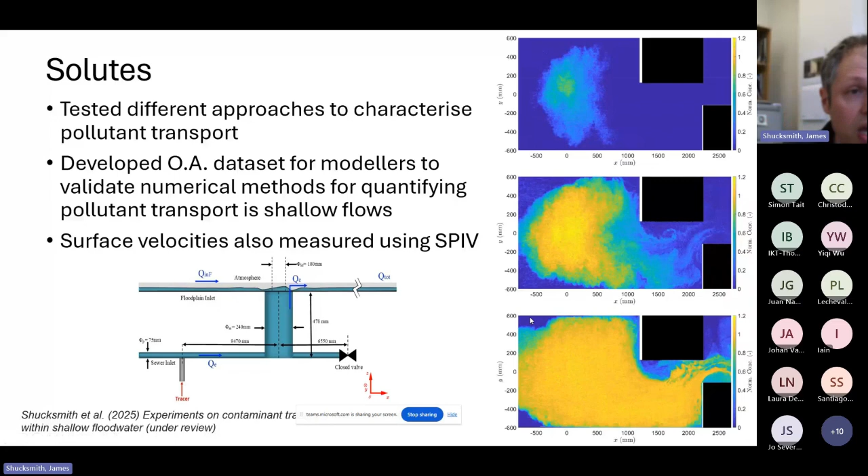In this particular case, we used a different experimental technique. We're actually dyeing the water, putting dyed water into the pipe flow, and then using a camera above to look at the intensity of light from the different color spectrums as you move downstream. We use that to work out the concentration at different points in the image, which is quite tricky to achieve because you need quite a complicated calibration.

You can see the method works reasonably well, apart from a few particular points where you have interactions between different cameras joining together, and you get certain flickering effects. So what we did as part of this work is compare these different methods and try to look at advantages and disadvantages of using the different techniques.

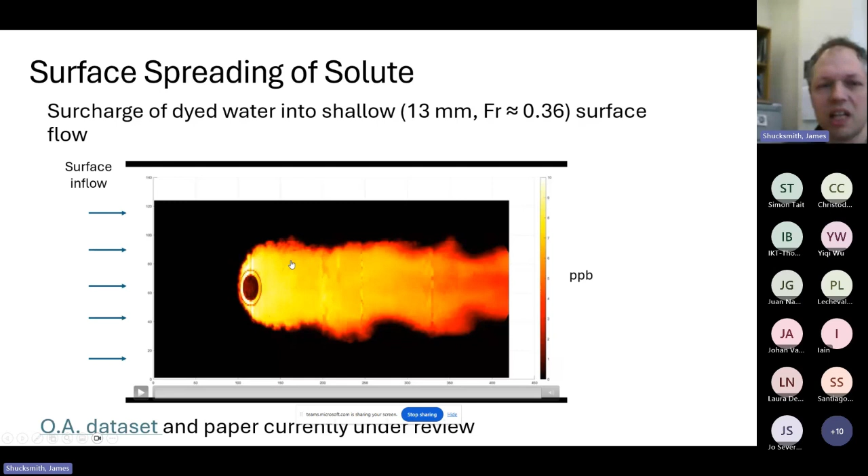Overall, they worked fairly similarly in terms of looking at the overall extent of where the pollutant ended up. There were some differences caused by local errors, particularly in the dye camera, and also some slightly different gradients we observed between the two techniques, which may be a function of the fact that the heat method isn't a conservative pollutant.

So we have quite a few different tests with different hydraulic properties, so different degrees of surcharge, different surface flows, and different layouts of obstructions. And that's been made available as an open access data set. There's also a paper currently going through the review process, which explains all the different aspects of the tests.

Having done solutes, we then moved on to start to look at sediments. Essentially we're interested in whether we can start to think about how the sediments in your urban drainage system firstly exchange to the floodplain, and then where do they spread on the surface. This is a bit more recent work, and some of it is a bit more preliminary, but what we've essentially been doing is injecting a mix of sediments and water into our sewer flow.

The first thing we looked at was essentially trying to quantify how much of the sediment load exchanges to the floodplain and how much continues in the pipe for different degrees of obstruction in the pipe, and also hydraulic properties. We also looked at the influence of having different types of manhole lid on the surface and how that affects how much sediment gets exchanged to the surface.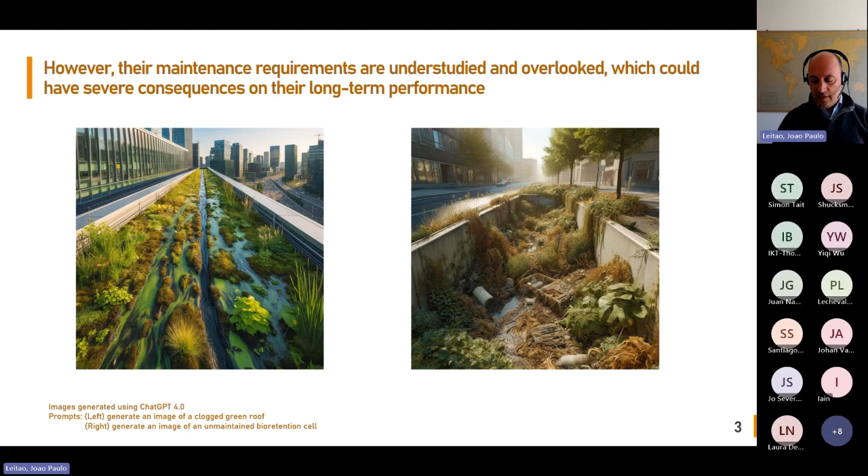Prabhat went to A Coruña to run an experiment in the lab. We've seen pictures and videos from Juan on this lab, where we have the possibility to have a rainfall generator. We assumed a normal BGI as designed with different layers, and we could clog or change the characteristics of the blue-green infrastructure, then compare the under drain flow hydrographs to understand the performance of these elements.

Prabhat went to A Coruña, working with colleagues there, also involved in the Co-UDlabs as a joint research activity. We had the rain generator, and access to BGIs that were mainly green roofs, used as an example of a BGI, having different surfaces, the under drain flow, and the possibility to have runoff.

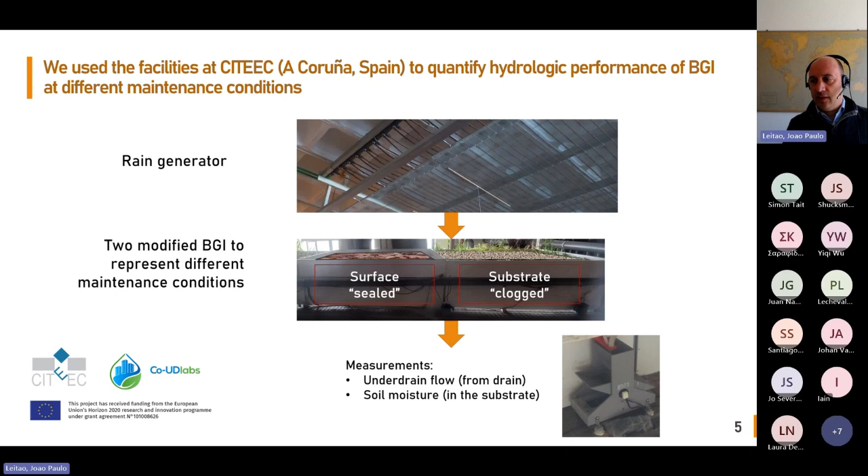We played with leaves on one side to have the surface sealed, and also with sand to try to replace or mimic a clogged substrate. Then we installed soil moisture sensors and measured the under drain flow.

In the lab, we significantly simplified these elements. For the rainfall, we have fixed intensity and duration. We did not have the surface inflow. Evapotranspiration was assumed minimal since we are in an indoor environment, and we avoided having overflow and ponding.

We measured the wet conditions and the drain flow. So this was the idea of the experiment.

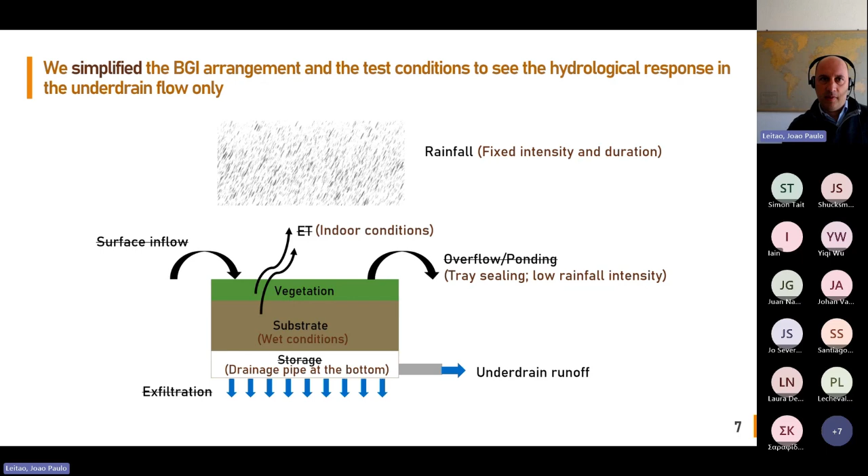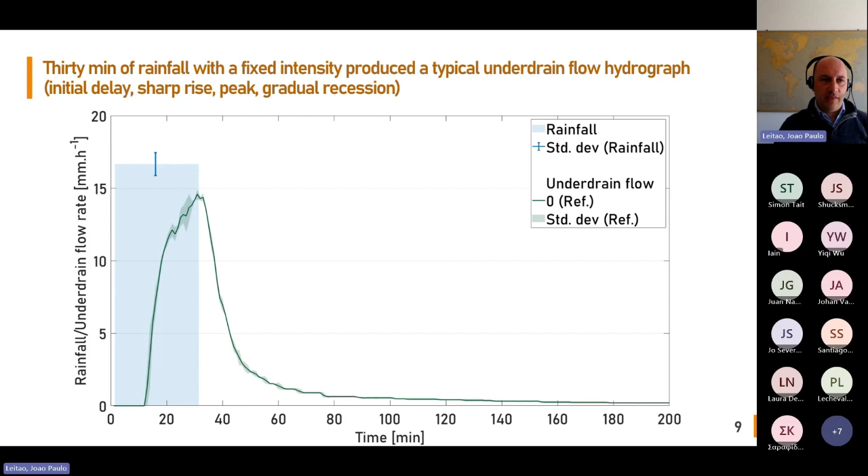As for the benchmark, we ran the system a few times, and we could see, as expected, the rainfall as this constant rainfall block. We ran the system several times, and as you can see, there is a delay in the under drain flow, and the system does not react exactly the same way each time, so there's some uncertainty there. Nothing special here, just to illustrate our benchmark that we're going to use later on.

Then we added sand and a solution of leaves to answer the question: how does leaf litter and sand accumulation affect the BGI's water balance? This was really our question.

We added sand into the green roof or BGI with different amounts, spread more or less evenly throughout the tray. As you can see in the pictures on the right, there's no sand, then a little bit more sand, and almost vegetation disappearing in the bottom photo.

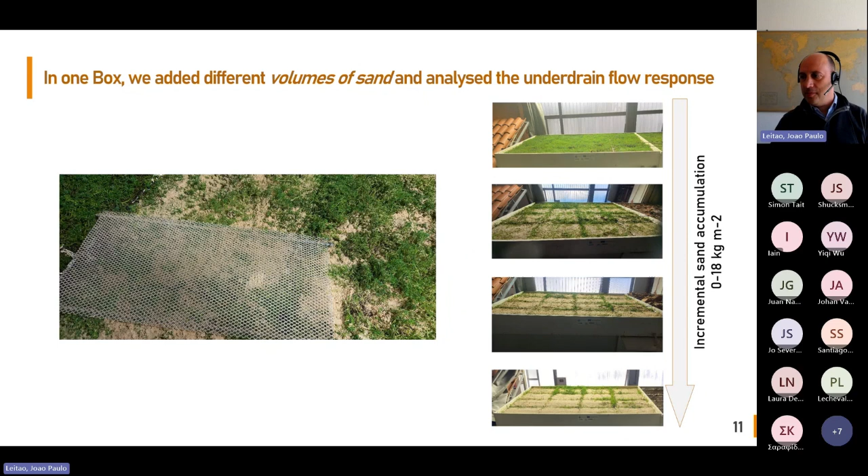What we could see here, compared to the benchmark, is that the under drain flow decreases when we added the sand accumulation. There's a slight delay in the onset of the under drain flow with more sand when we added it.

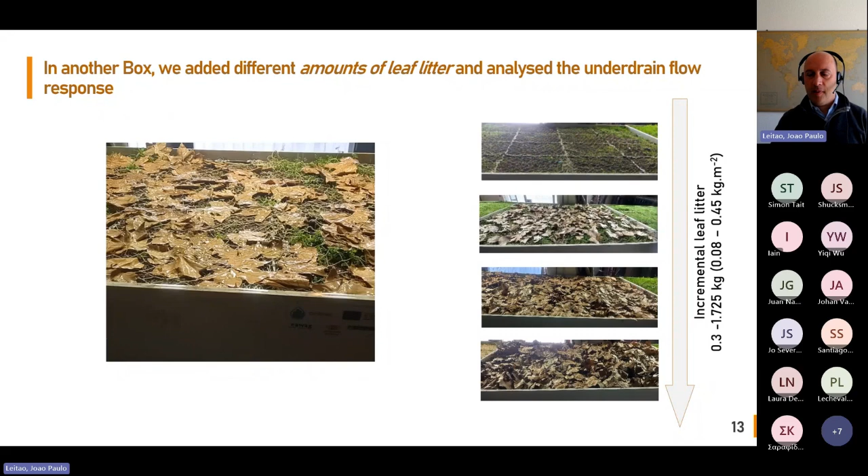When we looked into the leaves, here we can see one of the examples on this video on the left. We had an expectation that by sealing the surface, something else would happen. Again, in a similar experiment, we had different amounts of leaves into the tray, and more or less similar things did happen with the leaves.

Basically, the amount of under drain flow was reduced. I have to add here that there was no runoff, so there was most likely more ponding and more retention capacity by adding leaves and also sand. So it was a bit of a surprise result from these experiments that adding leaves on top of the substrate can help reduce the under drain flow.

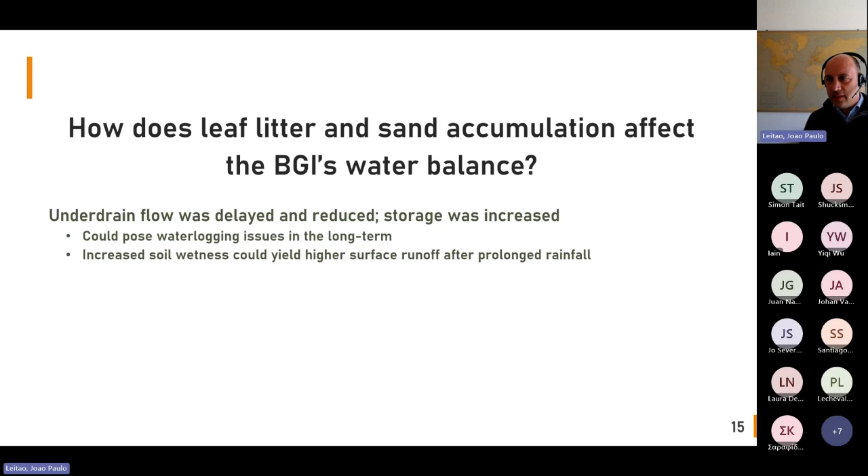Then keep more water into the system for longer. So to try to summarize how leaf litter and sand accumulation can affect the BGI's water balance: under drain flow was delayed and reduced, and storage was increased. This was a positive change in the hydrological and hydraulic behavior of the BGI, but also can pose some waterlogging issues in the long term. Increasing the soil wetness could also yield higher surface runoff after longer rainfall events.

So we published the data set, it's available - in a minute I will come to the link where you can get access to the data. But what is the value of these experimental data? As I said, it quantifies the effect of clogging and surface sealing on BGI performance, and hopefully helps us understand the influence of shock events that bring high amounts of pollutant loads later on, as a possibility for following research.

It also supports validating models that simulate the influence of incremental sediment buildup, so more work can be done on top of this data set. It also sheds light on the monitoring and maintenance requirements of BGI. As an example of these future research avenues...

Prabhat continued to work on his PhD and developed a methodology - he has finished, and is now in the process of publishing or submitting for publication the work. The question is, if we have a BGI and we would like to know if, in real life, it's performing as designed, it's difficult, because we can have the BGI implemented now for a specific rainfall event, but this very specific rainfall event may not, or most likely will not, happen in the future.

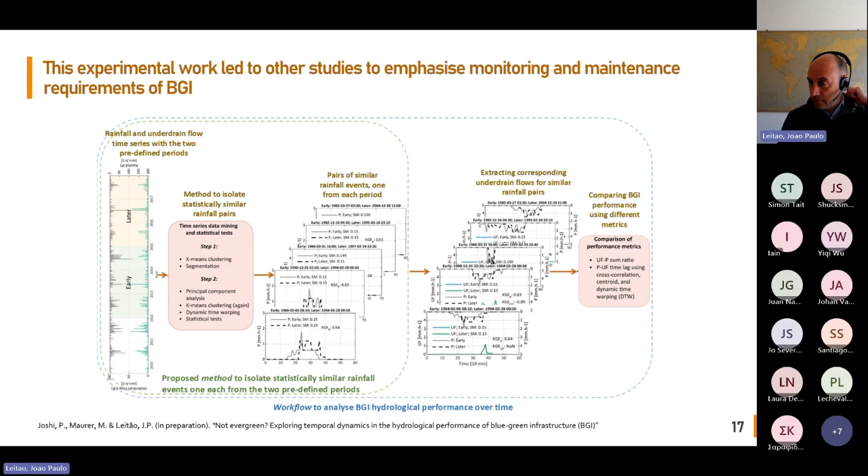So what Prabhat did was develop a methodology to identify similar rainfall events from different periods of a rainfall time series. He has done it and started to compare the BGI performance when using similar rainfall events from different periods, using a real rainfall time series.

Prabhat also used a real data set from Oslo spanning 5 years and could find 2 similar rainfall events separated by almost 5 years, and there also could see significant changes in the under drain flow.

Coming to the end - this experiment was really interesting to see how BGI's performance could change over time. The sand accumulation and leaf litter accumulation affected the water balance, resulting in slower and smaller under drain flow. We would like to use these results to emphasize the need for BGI monitoring and maintenance, in a similar fashion to how we look into pipes and pumps and the more conventional elements of drainage systems.